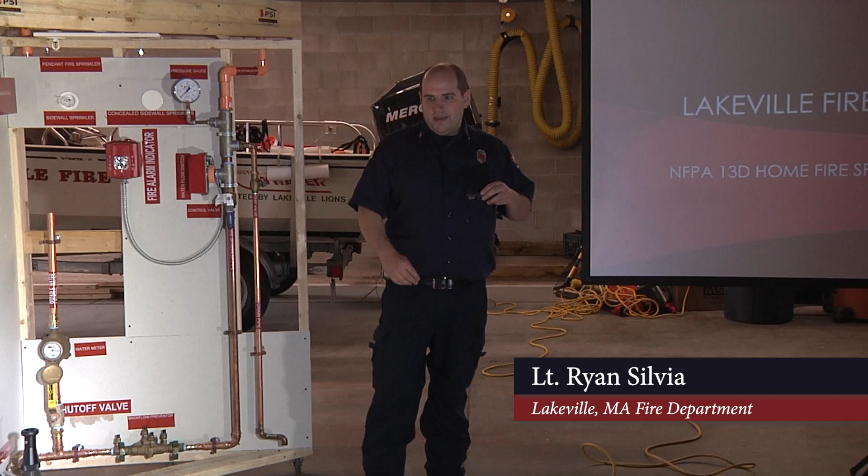Right, good morning, everybody. We're going to be doing our live stream presentation on our NFPA 13D home fire sprinkler system education. My name is Ryan Silvia. I'm a lieutenant with the Lakeville Fire Department.

We are here to give this educational presentation as part of our home fire sprinkler week from the Home Fire Sprinkler Coalition. We do have representatives from them here showing their support, which is awesome. But basically, we've been designated here on Lakeville Fire Department as a Built for Life Fire Department, which means that we've basically been recognized for our efforts in fire prevention and getting the message out on the safety and efficiency of the home fire sprinklers. So this is going to be part of our educational rollout that we've been going through all week here, okay?

So in order to kind of set this up, I usually like to start with talking about a little bit of history, okay? Because I think that figuring out where we came from is a really good way of setting the stage for where we are now and where we're going to be going in the future. So the concept of the automatic fire sprinkler is actually a very old concept. It's an old technology. The first one was actually invented by Phillip Pratt in 1872. And then that setup was improved and perfected by two gentlemen named Henry Parmalee and Frederick Grinnell in the 1890s. Okay, you can see on the screen here just some different variations of sprinkler heads through the years as they started improving these things.

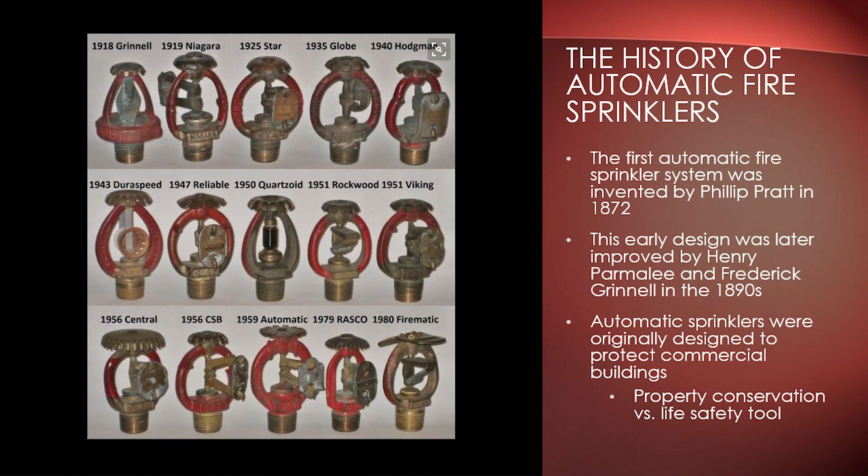Okay, one thing to understand about automatic fire sprinklers is that these were designed to protect commercial buildings originally, and they were designed really as a property conservation tool rather than a life safety tool. So these were really pushed in the early days by insurance companies because they were having these huge fires in these factories and warehouses, and they were losing a lot of property, right? These buildings were burned to the ground, they were losing all the product, they were losing the buildings, and we needed to try to figure out a way of preventing those massive property losses, right?

And it just so happened that once we started pushing these sprinkler systems into those buildings, we realized, hey, if we stop the fire when it's small and we control it, then all of a sudden now we have a life safety benefit there too, because people are less likely to get injured or killed in a fire if it's controlled early, right? So in 1947, we had the Truman Report. Okay, President Truman commissioned the President's Conference on Fire Prevention to address the losses in life and property resulting from fires. This is one of his big issues that he felt very passionate about during his presidency.

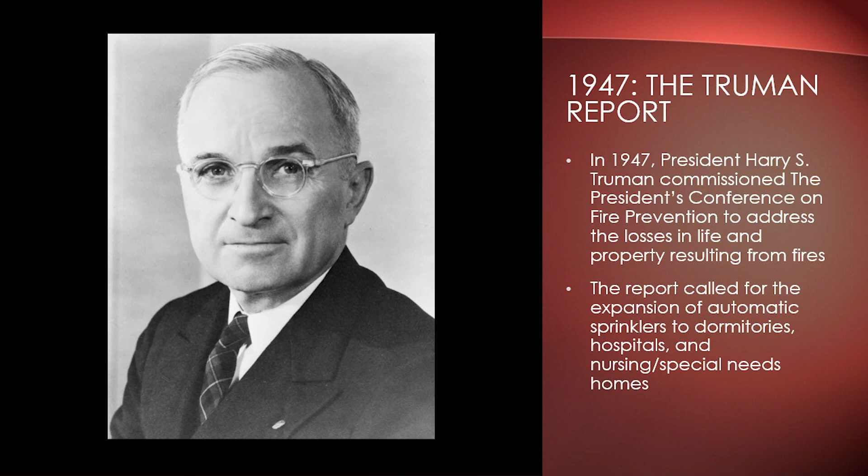So he started this conference, and one of the things in this report that they called for was the expansion of this automatic sprinkler system technology to include dormitories, hospitals, nursing homes, special needs homes, not necessarily residential at this point, but that was kind of where the ball started rolling to where we started thinking, okay, let's get these out of just the commercial buildings and let's start putting these where people are actually living and staying, right? So that was 1947. Then in 1973, we had the issuance of America Burning.

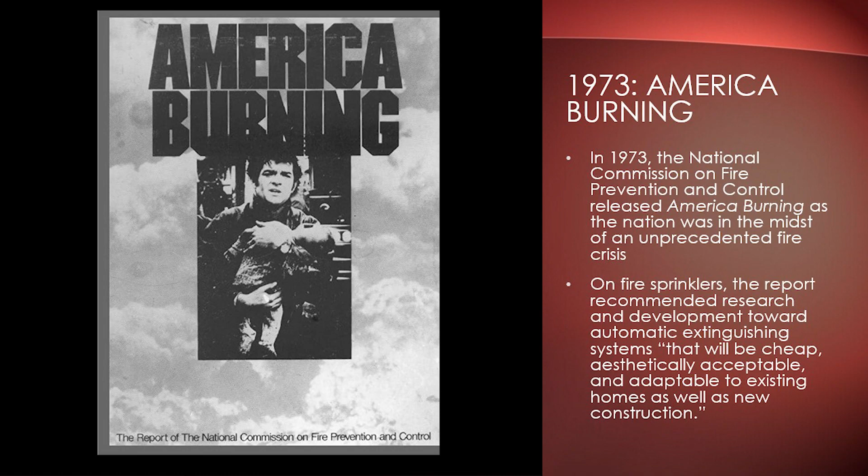Okay? The National Commission on Fire Prevention and Control released this report. It was a huge deal throughout the nation and for the fire service. We still reference this report today and a lot of the findings and recommendations there. This was released while the country was in the midst of an unprecedented fire crisis. The late 60s and 70s were a very bad time for our country for fires. We were leading the industrialized world in incidents of fire, property damage, lives lost. It was a major issue. So this report was very extensive. It's basically a whole book. All kinds of different recommendations came out.

But on fire sprinklers specifically, one of the things that the report said was that we need more research and development towards automatic extinguishing systems, fire sprinklers, that will be cheap, aesthetically acceptable, and adaptable to existing homes as well as new construction. So for the first time, we had a report saying we need to get these fire sprinklers into people's homes. That occurred in 1973. In 1975, the National Fire Protection Association released NFPA 13D. NFPA 13D, introduced in 1975, has been continually updated ever since.

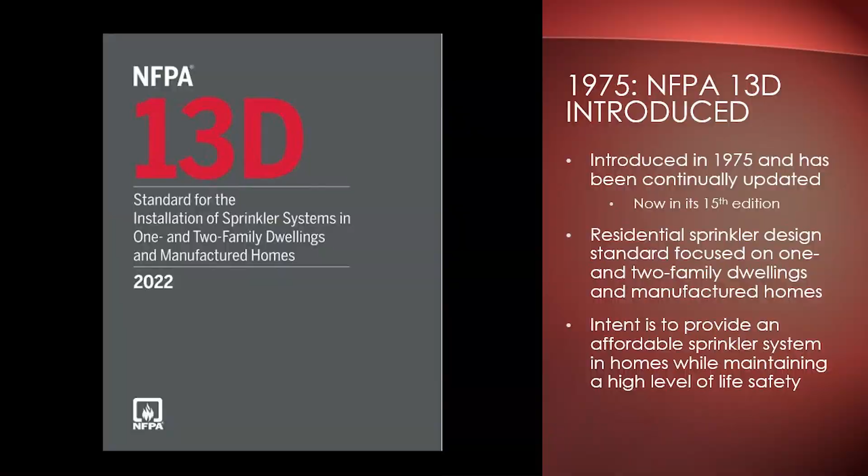It's now in its 15th edition. It's in the 2022 edition, which is the 15th revision of the standard. It is a residential sprinkler design standard that's focused on 1- and 2-family dwellings and manufactured homes. So these are the homes that you all are living in today. This was the first consensus document for that type of a sprinkler system, and it remains the industry standard today.

The intent of NFPA 13D is to provide an affordable sprinkler system while maintaining a high level of life safety. That's the purpose of the system, okay? So what is an NFPA 13D sprinkler system? If you're familiar at all with fire sprinkler systems, maybe you work in a building that has a sprinkler system, or an office or a warehouse, understand that this is a completely different animal.

Home fire sprinklers are a completely different setup. They use a lot of the same technology, but it's for a different purpose, okay? The NFPA 13D system is designed to suppress fires before they reach the flashover stage, buying time for occupants to escape safely. Home fire sprinklers are a life safety system. They're not a property conservation system. So they're not designed primarily to extinguish the fire.

They do in a lot of cases, and we have many case studies where they do actually extinguish the fire when it's just starting. But that's not the primary drive of the system. The primary drive is to prevent that fire from going out of control and reaching that flashover stage and preventing you from escaping. It's there to buy time for you to get out of your homes in the event of a fire.

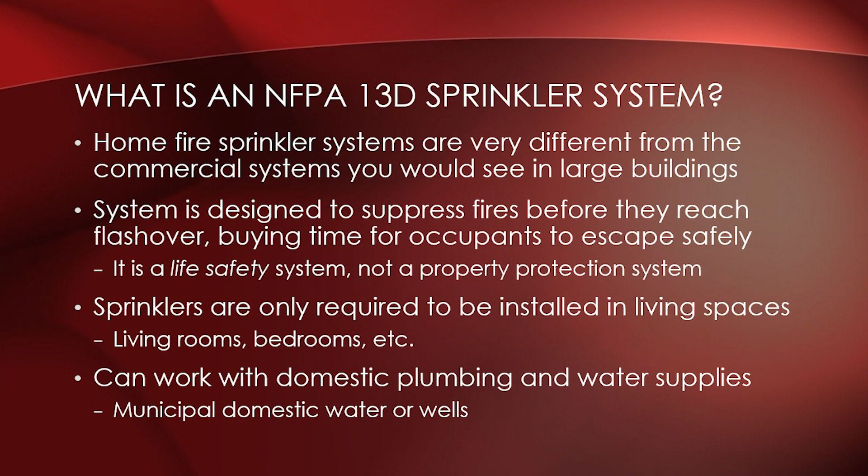According to the NFPA 13D standard, sprinklers are only required to be installed in living spaces: your living rooms, bedrooms, family areas, places where people commonly stay and gather. It's not throughout the entire house. And this system can work with domestic plumbing and water supplies. If you have town water, that's sufficient. If you're like the majority of people in Lakeville working off of wells, you can use a well for a 13D system.

The only thing you need, according to the standard, is that your water supply system has to be able to supply 2 sprinkler heads running for a period of 10 minutes. It's just enough time to get you out of the house. So you don't need extensive water supplies or really expensive options for this type of system. You can work off of your domestic plumbing.

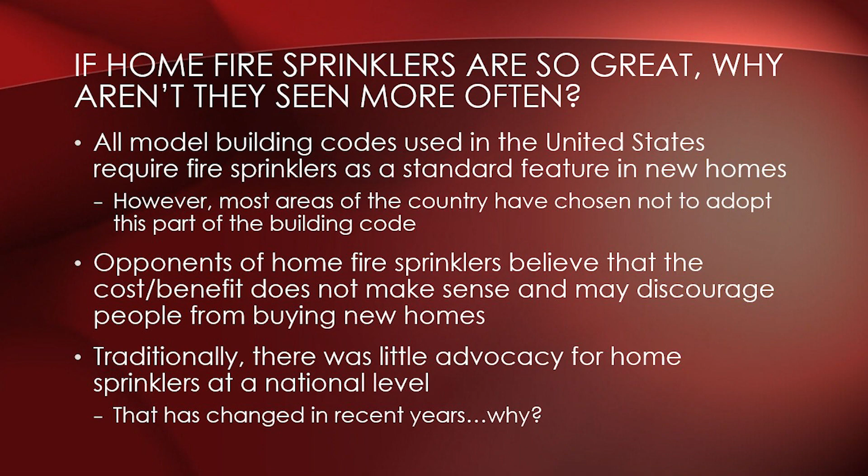So if these things are so great, why don't we see them more often? It may surprise a lot of you to know that all of the model building codes used in the United States today require fire sprinklers to be installed in new homes. But most areas of the country, with few exceptions, do not adopt that part of the building code. They grant an exemption and take that part out.

There are opponents of home fire sprinklers. From their perspective, the cost benefit of these systems doesn't make sense. They say the cost is too high for the potential benefit, and the additional cost may discourage people from buying new homes. That's their perspective from the other side.

Since 1980, our home fires in this country are down 66%. Okay, and that's due to a number of reasons, but we've gotten a lot better at fire prevention in our country, right? I think people are a lot more educated about the dangers of fire now. Fire departments certainly do a much better job with public education. We're out in the schools constantly teaching people from a young age about the dangers of fire.

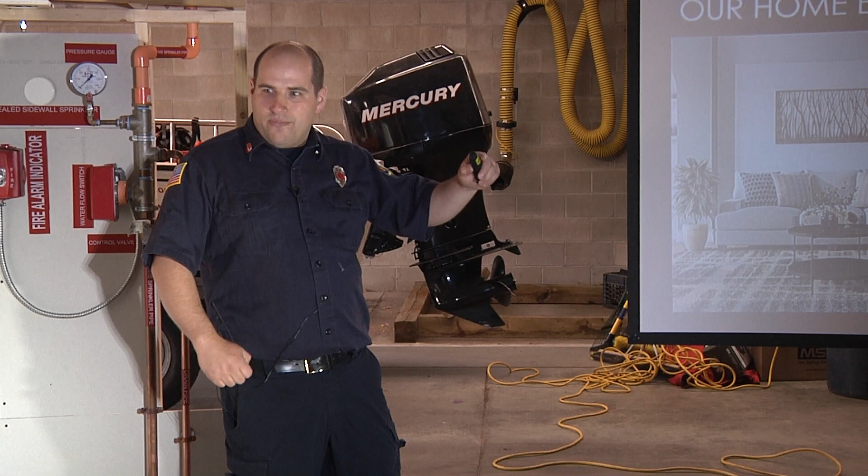Because our home environment has changed, okay? The houses that we're living in today are not your grandparents' houses. Think about all of the furnishings that you have in your house, your couches, your mattresses, your curtains. These are manufactured with synthetic materials. We're not making this stuff out of cotton and real wood and wool anymore. We're building this stuff out of particle board, out of polyester. We're using polyurethane foam padding, right?

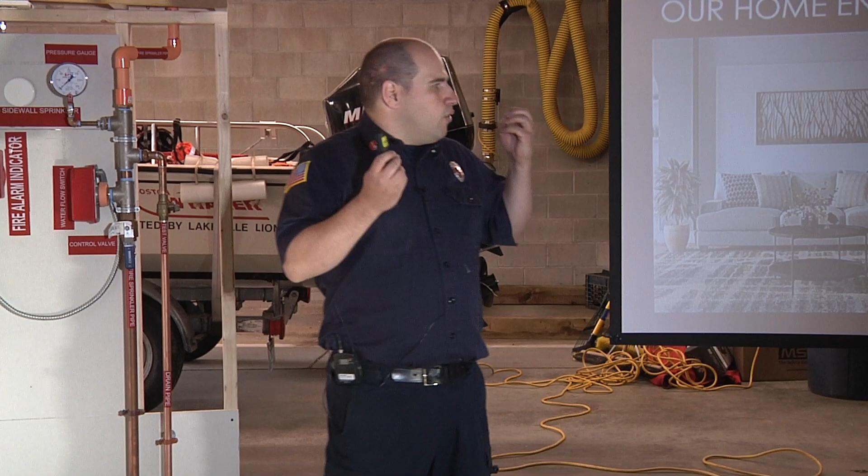These are all petroleum-based substances. Okay, these are made from oil, from petroleum. What that means is that when you look at all the stuff in your home, when these things burn, they burn very readily. They burn very, very hot, release tremendous amounts of heat, and they produce extremely toxic smoke, okay? Smoke inhalation is what kills the majority of people that die in fires, right?

And we're pulling people out of fires now, not just with carbon monoxide poisoning that most people probably know about. We're pulling people out of houses now with cyanide poisoning, with phosgene poisoning. All of this stuff is being produced as a result of the burning of these synthetic materials. And the heat from these things is tremendous when you light these things on fire, okay?

Also, modern homes nowadays are generally larger. They generally have more open floor plans than before, and they're built with lightweight construction techniques in many cases, okay? If anybody ever watches HGTV, you watch the Property Brothers and they rebuild these new homes, what's the first thing that people always want with these new homes, right? I want to take all the walls out. I want to make this big and open because I want more space to make the house feel bigger than what it is.

But you're taking away compartmentation there. You're taking away the ability to close off that fire and keep it contained to one room, right? Now you have more fuel available to the fire. You have more oxygen available to the fire. And because we're building these houses now with more lightweight techniques, we're replacing mass. We're replacing these big pieces of wood that they use to build your house, and they're replacing that with geometry now.

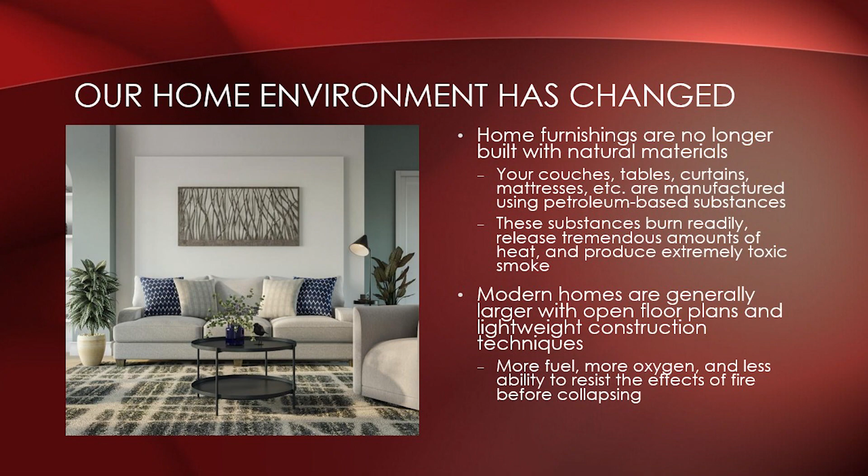They're building houses out of engineered trusses now and I-beams that are much more efficient from a construction perspective, right? And you're never going to notice the difference if your house doesn't catch fire. But when you have a fire, because you don't have that great mass of big dimensional lumber anymore, you're actually removing that home's ability to fight the effects of fire. Okay, so these buildings are collapsing a lot sooner now, and the fires in general are just way worse now than what they were before, okay?

You can have the best fire department in the world with the best response times, okay? And I'm going to tell you here in Lakeville Fire Department, we're going to do everything we possibly can to save your life and to save your home, okay? But we need a chance, okay? We need a chance. And average response times throughout the country to a house fire are running right about 8 minutes.

And I'm going to tell you we're probably about that here in Lakeville, because think about the area that we have to cover. We run out of one fire station with 3 firefighters on duty, okay? If you live out in an outlying area, if you live down in the Malbone Streets, Pierce Avenues, Harding Streets, that's a long way for us to go, okay? And what is happening to that fire while we're responding there is growing, okay?

Right? You may have heard that fires double in size every minute. Throw that right out the window nowadays, right? You're talking about 10, 20, 30 seconds that fire is doubling in size now. And in a lot of cases, the fire departments, we're not even getting a chance to get there and do the things that we need to do. So we need to have an equalizer, and that equalizer is going to be our home fire sprinklers, okay?

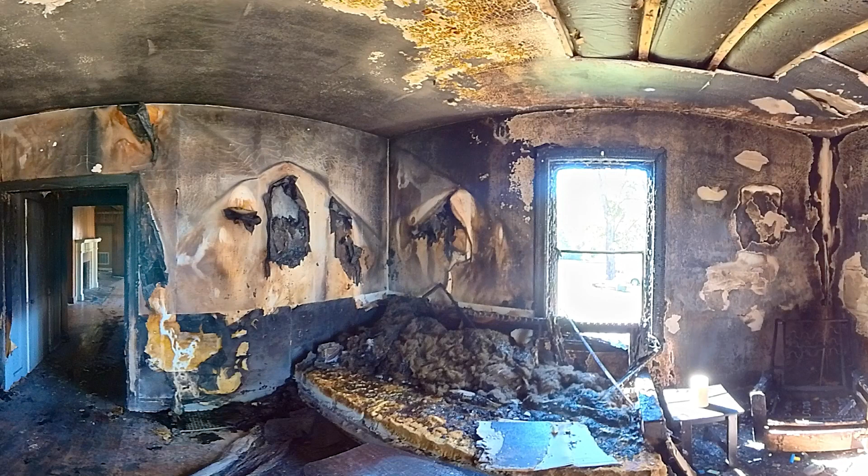Look around. Everything is destroyed by the extreme heat and smoke. Remember the flashover? There would be only seconds for the family to escape a fire before flashover. The destruction in this room makes it clear the home is uninhabitable and a complete loss.

So let's do a little bit of myth busting here now, okay? Because there's a lot of information and maybe a little bit of misinformation about home fire sprinklers that are out there right now, okay? Probably the biggest myth that I hear about sprinkler systems in general, but especially sprinklers in people's homes, is that people are concerned that when one sprinkler head goes, that means that the whole system activates, and you have 10 or 12 sprinkler heads going off in your house, okay?

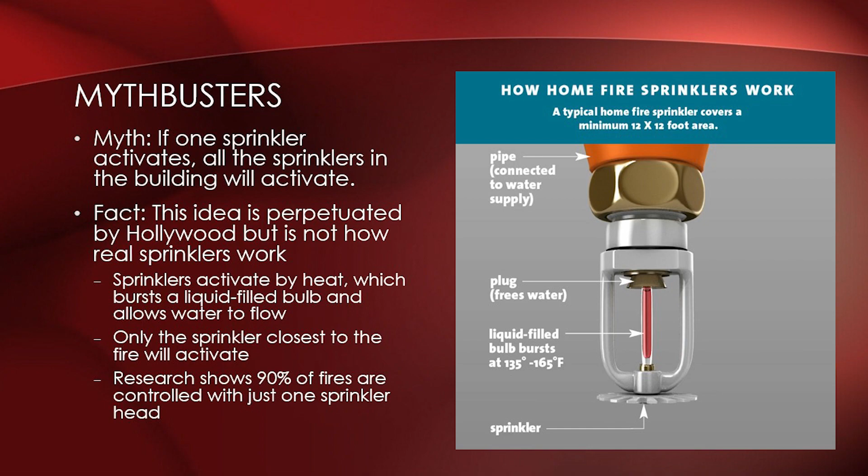And why wouldn't you think that? Because when you watch television, you watch the movies, isn't that what happens every time a sprinkler goes off? That somebody sets a sprinkler off and then the whole building is being flooded, right? That's a Hollywood fantasy, okay? That's for drama and for entertainment. That's not how a real sprinkler system works, okay?

The sprinkler system is activated by heat. And I'll actually pull a head out here, right? So this system is very, very simple. It's activated by heat. Usually it's rated for somewhere between 135 and 165 degrees Fahrenheit. And there's a little plug here, and there's a little glass bulb that has a liquid in it.

When this liquid heats up, it reacts with the heat at a certain temperature, and when that breaks, it drops the little plug down, and that allows the water to come from the pipe, and it hits this little bottom piece here that breaks the sprinkler water up into droplets, okay? And that's what extinguishes the fire. Those big droplets are what allows the sprinkler to work so efficiently because it absorbs heat very, very readily. But that's it. That's how a sprinkler works. It's a very, very simple mechanical device.

But when you have that happen, only the sprinkler head closest to the fire is going to activate. You guys saw it in the video, right? The sprinkler closest to the fire heated up, it let go, the water came down, and it extinguished the fire, basically. 90% of fires, according to research, will be controlled with one sprinkler head, okay?

So it's not like a deluge system or anything like that. It's just a very simple, one sprinkler head goes off, and the only time you're ever going to get more than one is if the fire grows beyond what that sprinkler can control, right? But 90% of the time, it doesn't happen. One head will do it, okay?

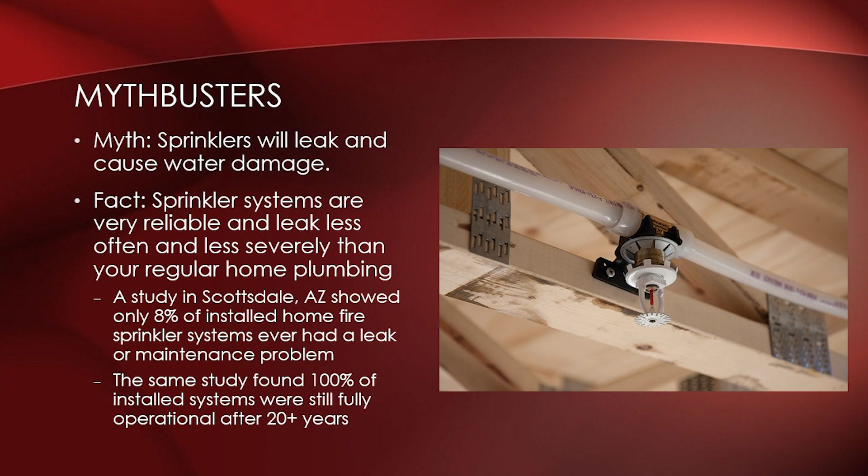I don't think so. The same study also found that 100% of the installed systems in Scottsdale, Arizona were still functioning. These guys actually went door to door and said, hey, can we come in and check your sprinkler system to see if it's still functioning? Some of these systems at the time of the study were 20-plus years old, and every single one of them was still functioning the way it was supposed to.

It was actually funny because in the study they talk about how some of the homeowners didn't even know they had sprinkler systems in the house because they had moved in afterwards, and they ask if they can check the sprinkler system. They're like, I have sprinklers in my house? They had no idea. So this is something that is in the background, you don't even notice it, right? But it's always there and it's always working for you if you need it. That's the important thing.

Here's another thing. People think, or they'll say, well, if I have a sprinkler go off in my house, it's going to cause more damage than the fire would. Not true, okay? You guys saw in that video the devastating effects that fires have, right? It's much, much better to control that fire early on than it is to allow it to burn out of control. And here's the thing.

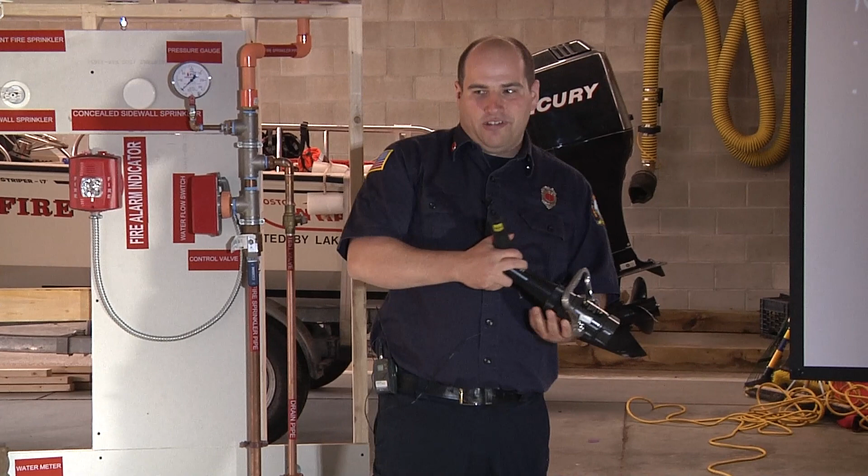If you have a sprinkler in your house, depending on the head, it's going to flow between 10 and 26 gallons per minute, okay? If you allow that fire to burn uncontrolled, not only are you causing all that damage from the fire, but now I'm going to come in with the fire department, and I'm going to use probably my 1 3/4 hose line, which is our standard fire attack hose line. This nozzle here flows 185 gallons of water a minute, okay? What's going to cause more water damage to your house, the sprinkler head at 10 and 26 or this thing, right?

FM Global actually did some studies on water damage from fire sprinklers. They showed that home fire sprinklers generally reduce the water usage needed to control a fire anywhere between 50 and 91%. It also cuts greenhouse gas emissions by 97%, because now instead of allowing that smoke to vent into the environment, it's being controlled when the fire is small, right?

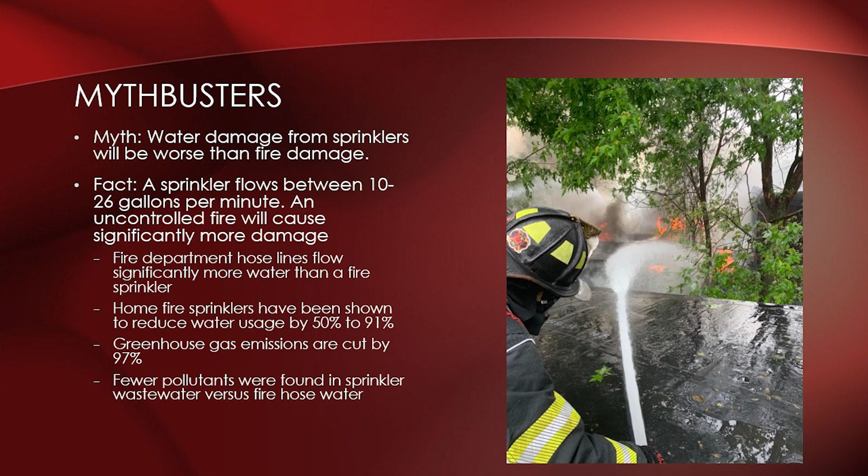And they even did a study on the runoff water from fires with home sprinklers versus not. There were actually very few contaminants in the water runoff from the fire sprinkler because it's controlling the fire before it has a chance to burn more material, right? So when we get there with the fire department, we're putting 185 gallons of water a minute into your house, and this has already all been burned up. All that water runoff contains all those bad pollutants, those carcinogens that we don't want people being exposed to, right? So not only are they life safety friendly, not only are they friendly for your property, they're also environmentally friendly too.

Here's another myth, right? Sprinkler systems, people are afraid they're more prone to freezing in the winter, okay? That's not really true either because, again, home fire sprinkler systems, if you're following the standard, are only being installed in living spaces. So they're not any more prone to freezing than any of your other domestic plumbing, okay? Obviously, if you lose heat in your house for a long period of time during the winter, they can freeze just like any other piece of plumbing in your house, but they're no more prone to freezing than anything else that you have.

Another one I hear sometimes: well, I have smoke detectors in my house, so why do I need fire sprinklers? Smoke detectors are great. We love smoke detectors in the fire department. They're essential for fire protection because they give you early warning when a fire starts, okay? But they only provide you detection. They do not provide you with suppression. They are a passive system. They let you know something's going on, but they don't take any steps to combat that fire or to protect your egress, okay?

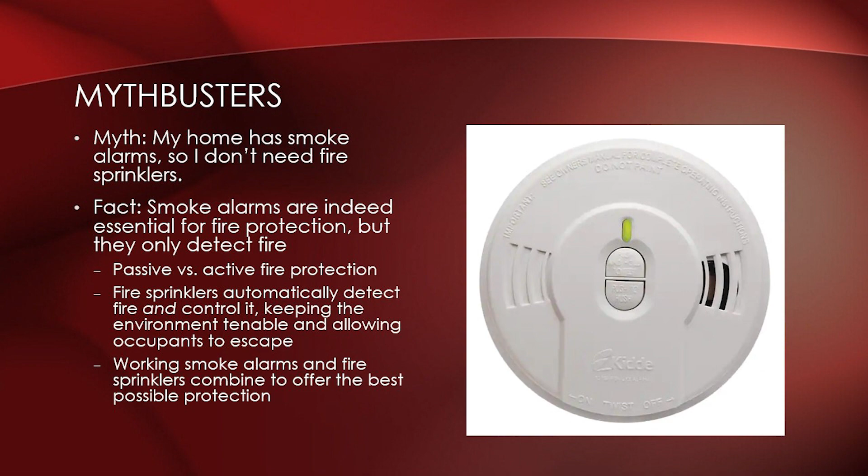A sprinkler system does both. It detects the fire by heat, and then when it activates, it puts the water out and it suppresses the fire, okay? So what we recommend is that you have both. You have working smoke alarms and you have home fire sprinklers. That gives you the best possible protection because now you have your alerting and then you have your suppression to keep your environment tenable and to allow you to escape, okay?

Another one that I hear a lot: well, I don't want to deal with the expense and the maintenance of these systems, okay? We kind of already talked about it, but I'll emphasize it again. Home fire sprinklers require almost no maintenance, okay? They only work when you need them, right? And when you don't need them, you hardly notice them. Like I said, there were people in that study in Arizona that didn't even realize they had them in their house.

A couple of things that they do recommend. They recommend that you do a simple flow test on these things twice a year. You do not need a contractor or professional to do that. You can do that yourself, okay? And I'll go over it when we do the prop. But basically, there's a test valve that twice a year you go in there and open up. And that's going to flow water through a drain.

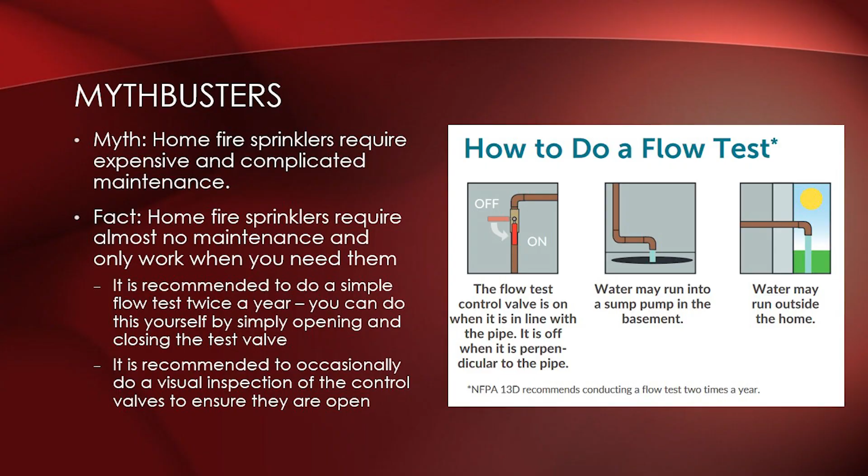And if you have water coming through that test valve, you're good to go. And then you just close it and it's fine. And they also recommend that occasionally you just do an observation of your plumbing and just make sure that your valves are open. Make sure that the kids, the dog, whatever, didn't go down there and knock a valve closed. They just recommend occasionally you go and just make sure that everything's functioning. But that's it, right? If you have a lawn irrigation system, lawn irrigation systems require way more maintenance than this does, right? And that's only protecting your lawn, not your life.

So the bottom line, what does it cost? That's going to be a deciding factor for a lot of people. It's really difficult for me to tell you exactly what it's going to cost to put a home fire sprinkler in a home that you're building, because it's variable depending on the community, depending on the building materials. What I can tell you is that the national average is $1.35 per square foot. That's the average. And this is pretty consistent across all the studies that I've read, it works out to about 1% of the total cost of the home. So if you are building a home with fire sprinklers, it's going to cost you probably about 1% more to add that than if you didn't do it.

To me, that 1% is a pretty good investment for your life safety. And to put it into perspective, that lawn irrigation system, which I see all the time in new houses, is going to cost you about $1.43 to $2.35 per square foot. Wall-to-wall carpeting is going to cost you $3 to $7 per square foot. What's the better investment when you're talking about a home that you're living in? You want to make sure that you're safe and that your family's safe.

And those costs are decreasing over time. That's a big deal too, and that's probably half of what a home fire sprinkler system would have cost in the 90s, because we're getting better with technology now. There are materials out there that bring the cost of these things down. Also, one thing that's being found is that the areas that require fire sprinklers generally have the lowest cost. The reason being is that you're having more systems being installed, so these contractors are buying these components in bulk. They have more experience with installing them. So that ultimately drives the market cost down. So the more you put in, the less expensive it's going to be.

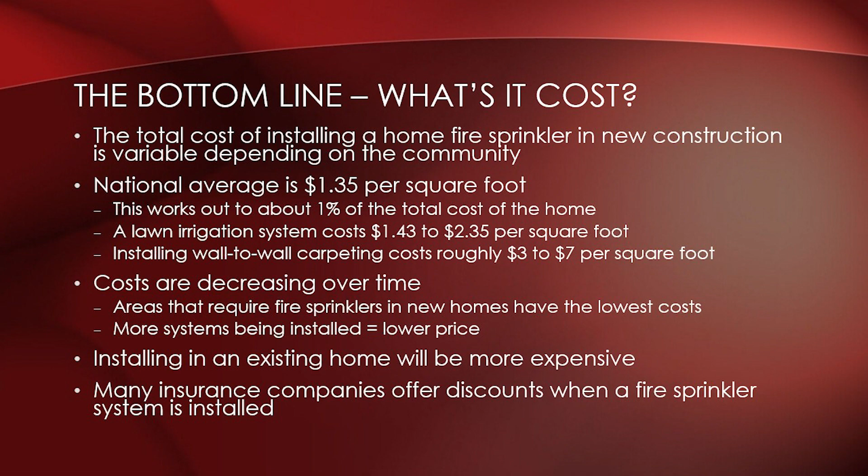Just keep in mind that we're talking a lot about new home construction here. You can retrofit this into an existing home. It is going to be more expensive, just like with any renovation. So I'm not discouraging anybody from doing it. I'm just letting you know that those costs are going to be more if you're trying to retrofit versus putting it in a new home. And that's why we're really trying to push this out into new home construction. Another thing to keep in mind is that many insurance companies also offer discounts when a fire sprinkler system is installed. So that minimal extra cost, you may actually make it up over the lifespan of that house through discounts from your homeowner's insurance company.

So if you're interested and you think this is a good idea and you want to do more to advocate for this, what can you do as a citizen? If you are looking at building a new home, or doing significant renovations even, ask your builder about home fire sprinklers. Ask them about your options for installing these inside your home. They are not required in Massachusetts, but they are available. So if you're going to be building a new home, ask for it. It's worth the investment. You can also contact your elected officials and urge them to support home fire sprinkler laws. In Massachusetts, our building code is basically set to where you can't, as a community, go above and beyond what the building code is.

There's ways around it, like you can do things in certain neighborhoods on a case-by-case basis, but basically if the town of Lakeville said, I want to mandate fire sprinklers for all new construction in the town of Lakeville, we can't do it, okay? There's been efforts to change that, but it gets shot down in the legislature every time, all right? You as a citizen have the power to contact elected officials and say, I want more. I want to be able to have residential sprinklers in my community.

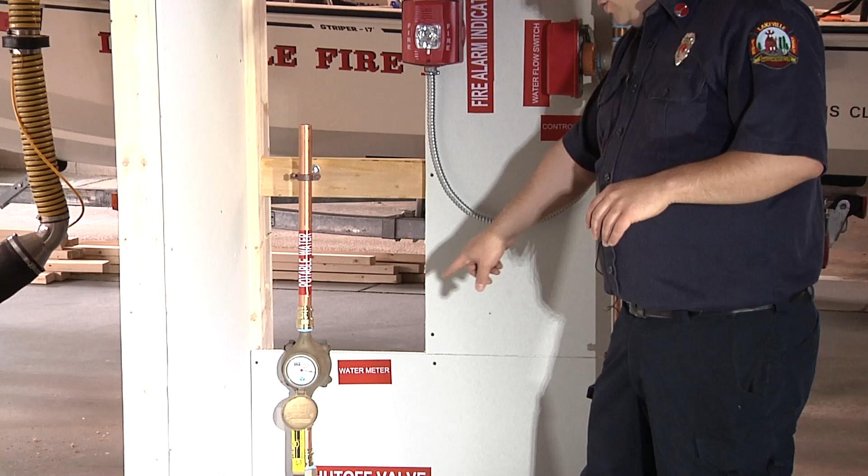So this just kind of goes through some of the components here that we have. This system that's shown right here is a standalone fire sprinkler system. So you have water coming in from wherever you get your water from, either your town line or your well or cistern or whatever you have supplying this. It comes in, and a standalone system is going to split between your domestic water that supplies your sinks and toilets and all that stuff, and then your sprinkler system.

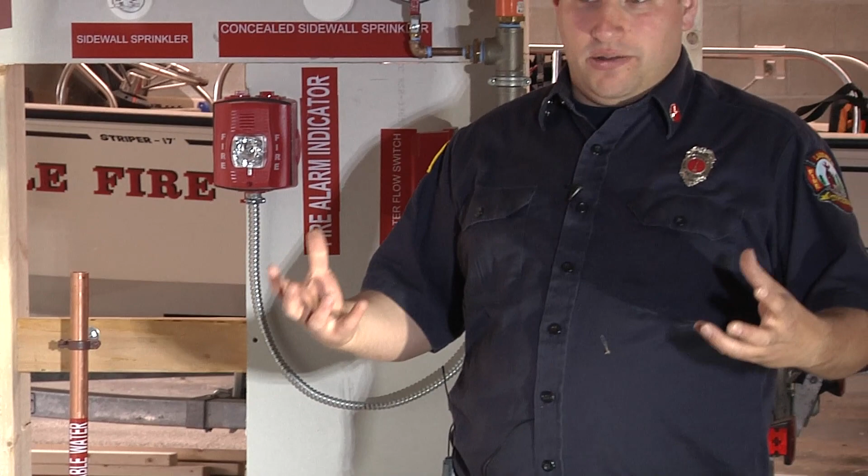You can now get a multi-purpose system that actually has the same piping that runs all your domestic plumbing. You can actually put the sprinkler system into that, okay? That's a big cost savings. And you can talk to your builder about the specific system that would be best in your home. But there's new technology out there that's really driving the cost of these systems down, right? But in this case here, you've got water coming in, and it goes through to your fire sprinkler system.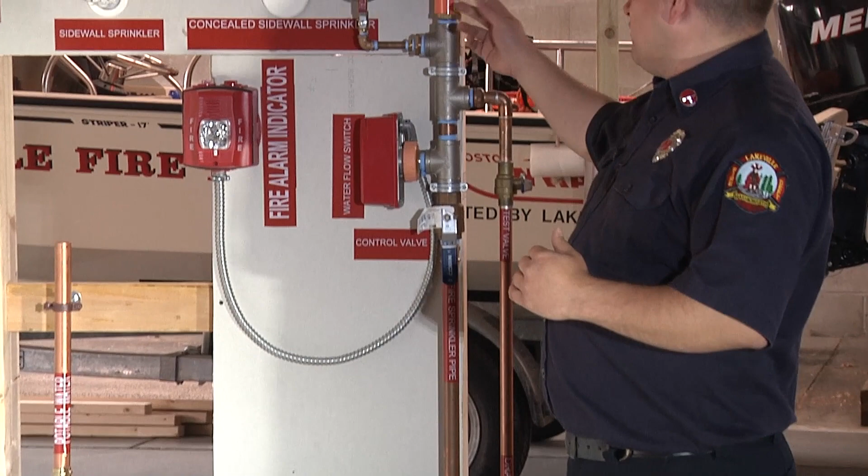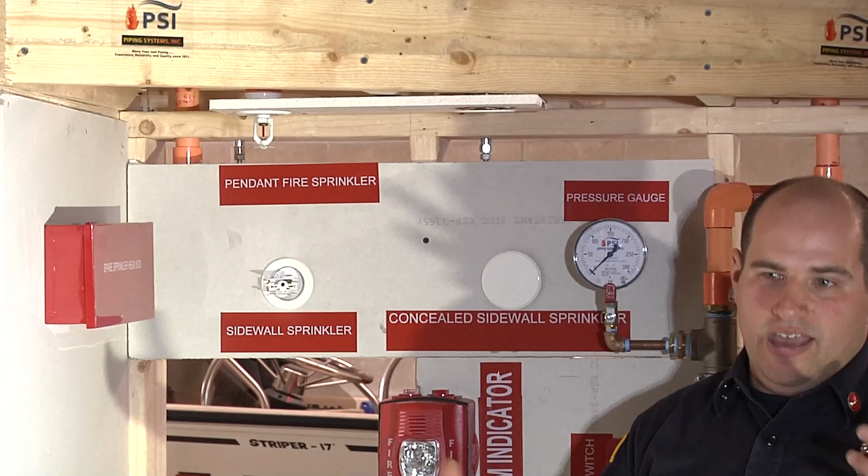This is copper pipe here, standard copper piping. You can use steel or copper, but you can also use PVC piping for the sprinkler system, or you can use PEX piping, which is very, very economical, okay? So all this is available per the NFPA 13D standard, but if you want to save on cost, you can use plastic piping. That's totally acceptable for this system. The piping goes up, and then it's going to feed your sprinkler heads, which are only going to be in your living spaces, unless you choose to do other stuff.

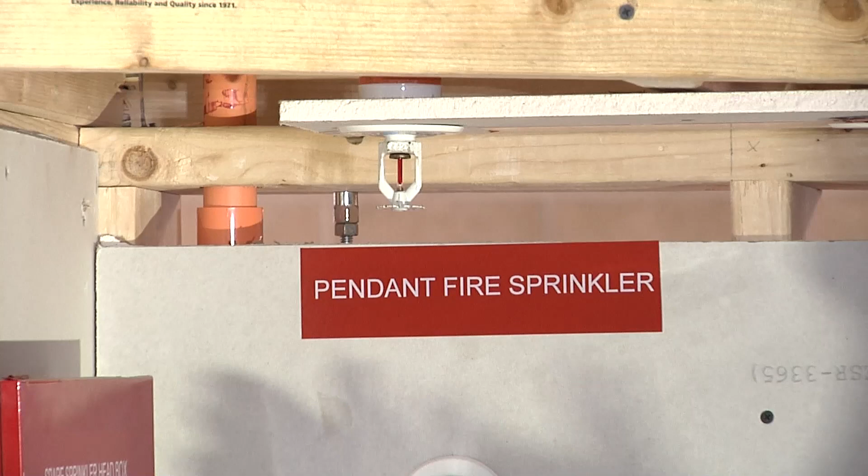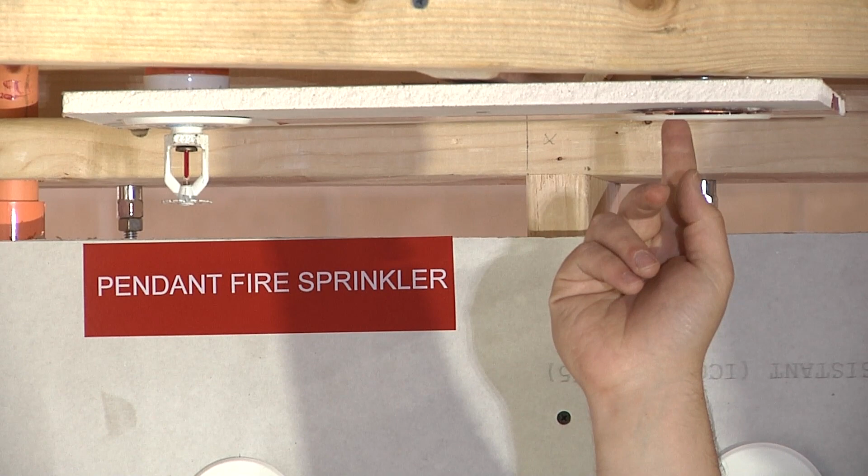One of the things that people get concerned about with these pendant sprinkler heads is the looks, okay? Like I don't really want ugly sprinkler heads coming down through my ceiling. You can get a concealed sprinkler head. This has a little plastic cover that can be painted to match your ceiling, right? And it's the same thing, it'll heat up when exposed to fire, and this will actually drop down, and then you have this when you need it. When you don't need it, it's recessed in and covered. So if you're worried about aesthetics, they've already thought about it for you.

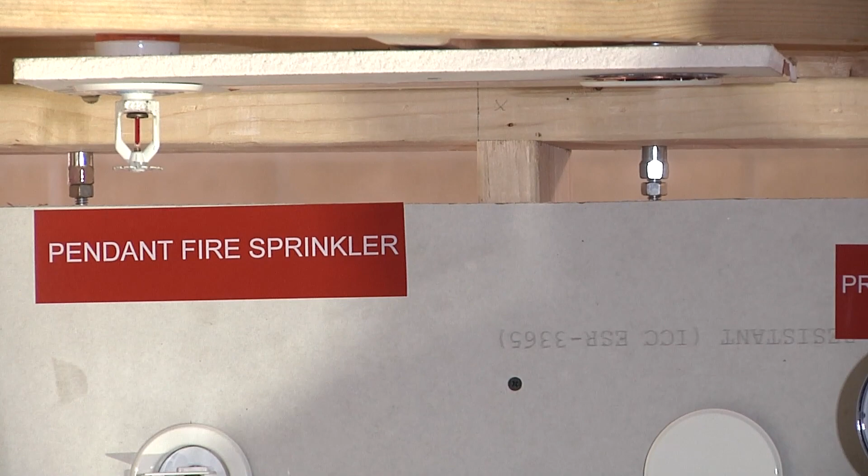One thing you do have to be careful of if you decide to go with this type is don't paint these over. Because I know a lot of people like the DIY stuff and they change colors in the house or whatever. That's fine. But just make sure that you don't paint over this, because if you paint it and make it so that it can't drop down, it's not going to work.

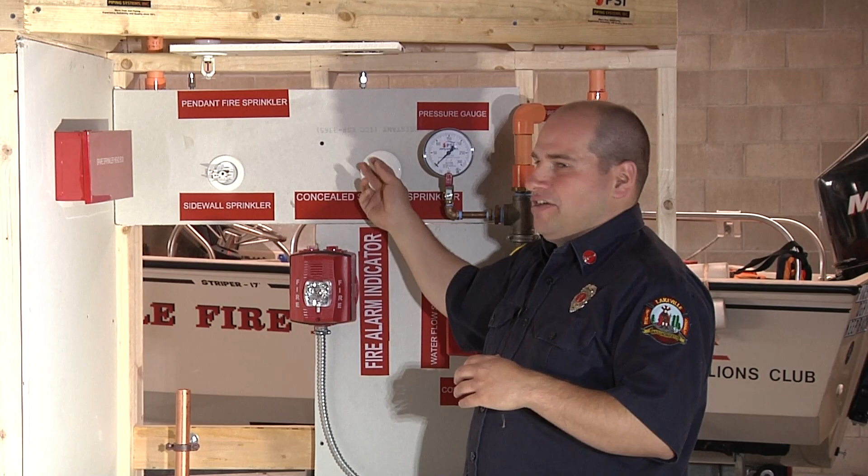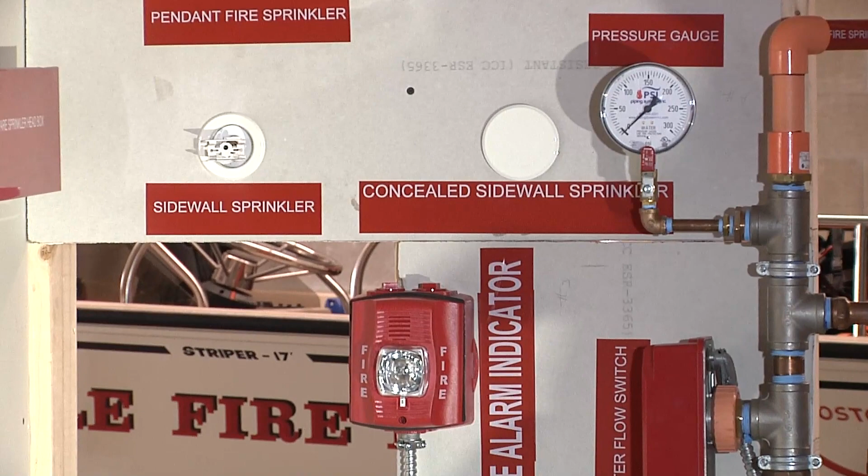But these are a great option for homeowners that are concerned about the looks. And then, this obviously is going to be overhead in the ceiling. Depending on the configuration of your house, you may have to drop these down a little bit. You may have to have them in the sidewalls, which is the same thing. You can have a concealed sidewall head too. All right, so there's no real major issues with this, not looking right for your guests coming in or whatever. You're not going to notice it, honestly, until you need it.

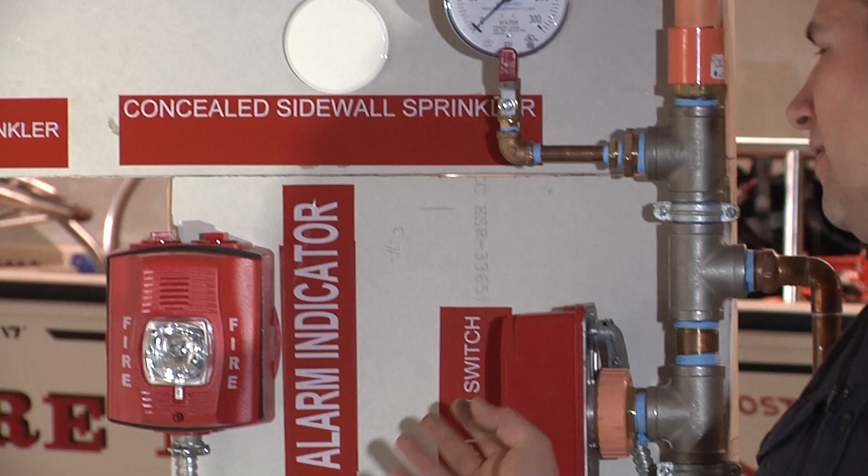There are some optional things that they put on this prop that you can get if you want to. This has a water flow switch that's actually hooked up to a fire alarm indicator. So if you wanted to, you could have an outside strobe light. That way you can let the neighbors know if you have an activation of the sprinkler. You can hook it up to a gong if you want to. It's totally optional. You don't have to have it, but it's there and available to you if you want it. There are things that you can upgrade, but it's not necessarily a requirement of the system.

Okay, you don't have to carry any spare sprinkler heads. If you guys are familiar with the commercial stuff, you have to carry a certain number of spare heads. You don't need that with a home fire sprinkler system. They put a backflow preventer here. A lot of communities require this because if you have a sprinkler system and the water is stagnant, they don't want that water to backflow into the domestic side.

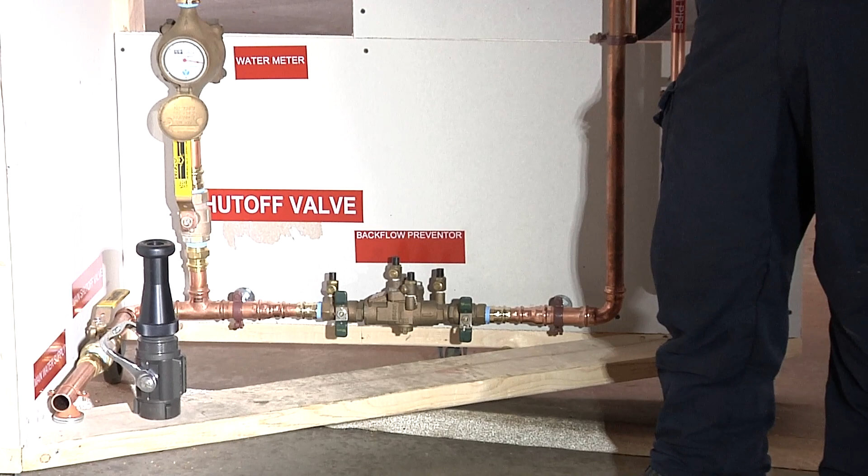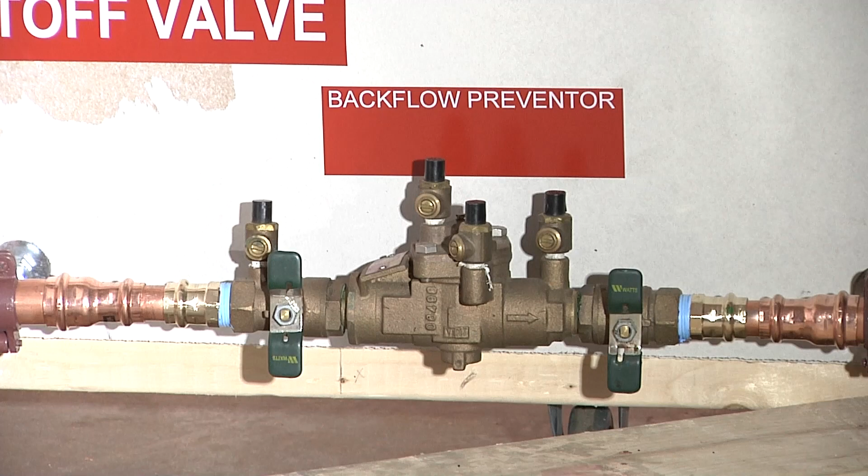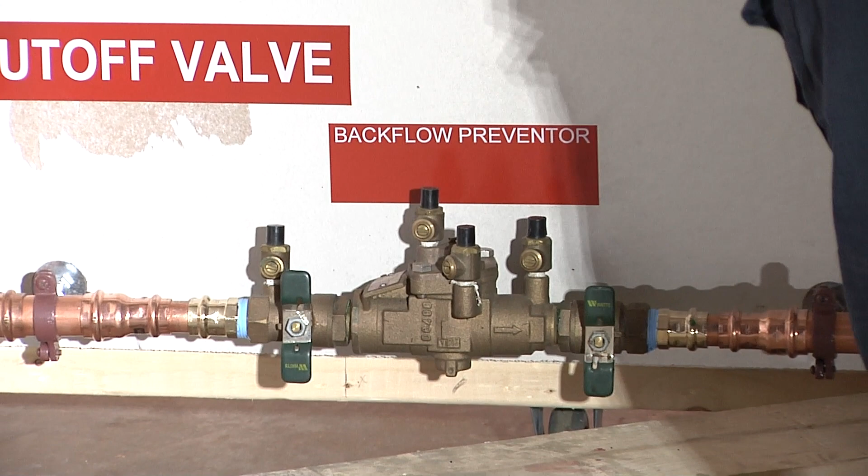That is not required per the NFPA 13D standard, and what they can do now to eliminate that is they can actually tie the sprinkler system into one of your toilets. So when you flush the toilet, it actually cycles the water through the system, so the water is never stagnant. So that's a big cost savings there, because not only can you get rid of that, but you can also reduce the size of the piping that you need, because you don't have to overcome the pressure of that backflow preventer. So there's all kinds of new technology out there that really helps drive the cost of these sprinkler systems down, so look into it.

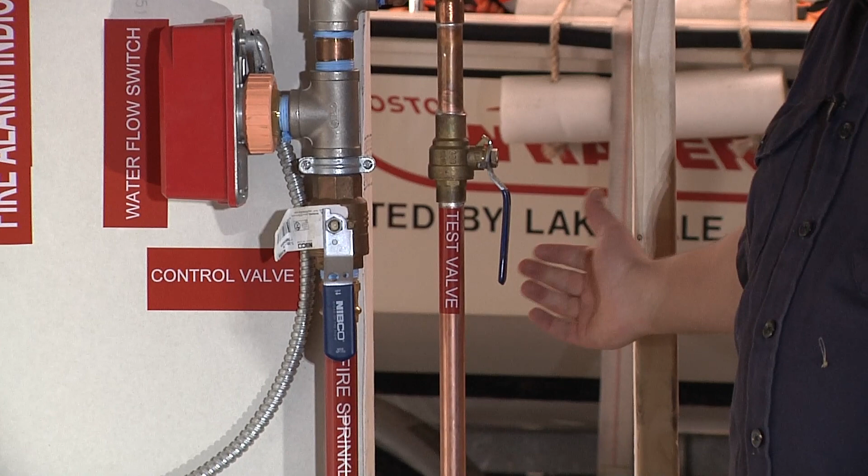And then we were talking about some of the maintenance things to do here. This right here is your test valve that I was talking about. This normally would be closed. Twice a year, come in here and just open this test valve up, okay? Water's gonna flow, it's gonna go out a drain that usually goes to the outside of the home, right? Check that out, make sure water's flowing. If water's flowing, you close it off and you know your sprinkler system's working. That's all you gotta do.

And then every once in a while, you got your control valve here, right? Just make sure that this is open. If it's open, it's in line with the pipe. So every once in a while, I would say, just go there and make sure that that's all set. So that's the presentation that I have for you guys.